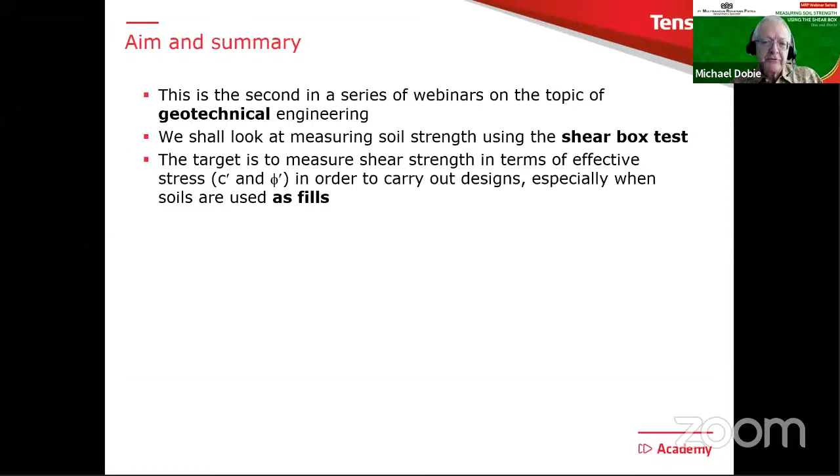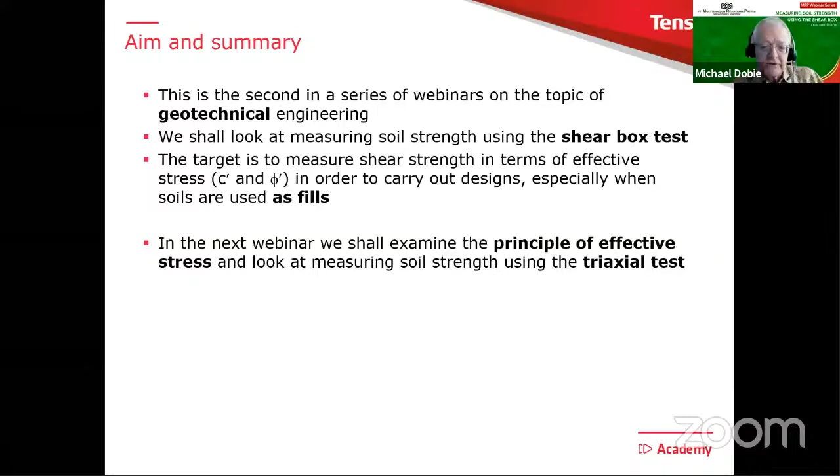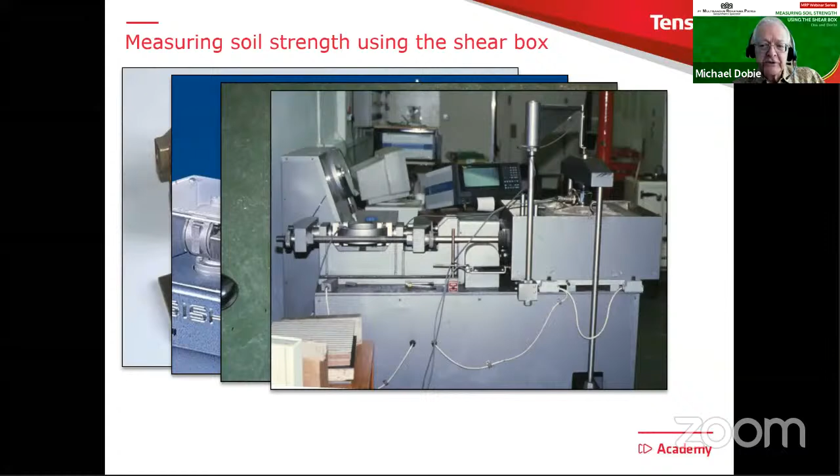What we need to remember in the whole of this discussion today is that what we're trying to find out is the shear resistance in terms of effective stress on a particular plane. Now, of course, in a shear box, the plane is created by the action of shearing in the middle of the shear box. We know that. Is that a bad thing? Well, not at all. It actually gives us a very good indication of shear strength, and I think that's why this test gets used so much.

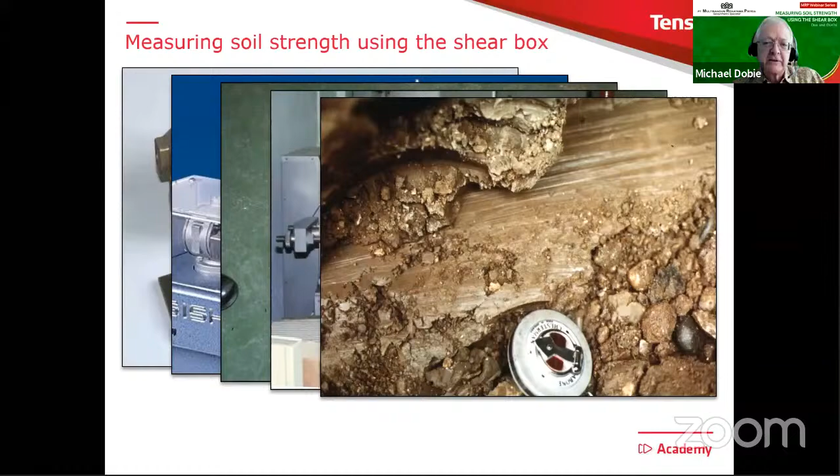I think the reason why I have made this our second webinar topic is that when I look at geotechnical reports from Indonesia and many other places, the shear box is frequently being used to determine the strength parameters for fills. So it is therefore an important test.

So who is it intended for, this webinar? Well, the aim here is really to supplement existing standards and codes of practice. And what I tell you is going to be based on an extensive experience of both carrying out and reviewing data from shear box tests.

Perhaps one target is to create some kind of checklist of features and test conditions which you should look at when reviewing results. As we go through this webinar, look out for these blue boxes, which will pop out quite a lot because they provide additional information and pose a few questions. You've already heard there will be 3 questions at the end, and maybe there will be some clues in these blue boxes.

The material is aimed at civil engineers in general who have some involvement in ground engineering, which is all civil engineers really. It might be of interest to more experienced geotechnical engineers, but the main target is looking at the strength properties of fills, in particular for reinforced soil applications, because that's the field we work in. This is vital information when looking at the design of these structures.

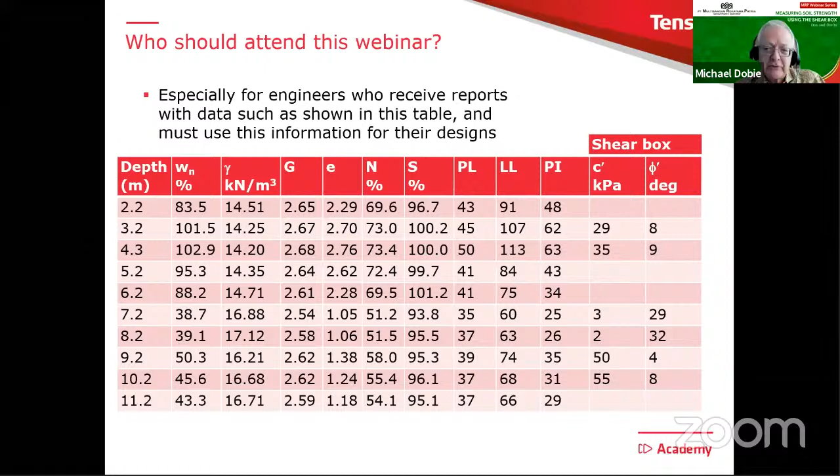I think in particular, it's like this. I'm sure many of you will receive reports, maybe from site investigation contractors, and get tables of values like the one you see there. At the end of this table, there'll be a couple of columns showing shear box test results, C' and Phi'. The question then is, should you just use those values directly? Should you just take them out of the report and put them straight into your slope stability program or finite element analysis software? Or should you have a bit of a look first and make sure these properties are suitable for the task you're going to use them for? You'll realize immediately that my answer would be yes, of course you should.

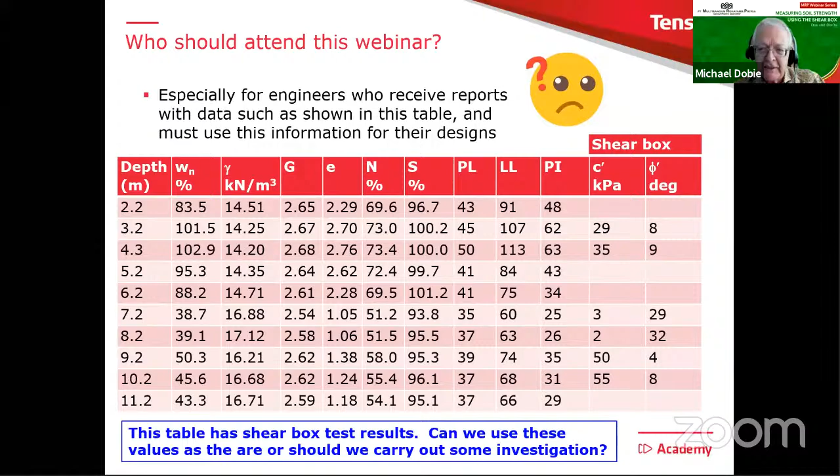Some important standards I'm going to refer to today: the ASTM, reference D3080, is for this particular test. In particular, it is for consolidated drained testing conditions, which is very important. Then there is an SNI 2813, which has the same basic title, but of course in Bahasa Indonesia.

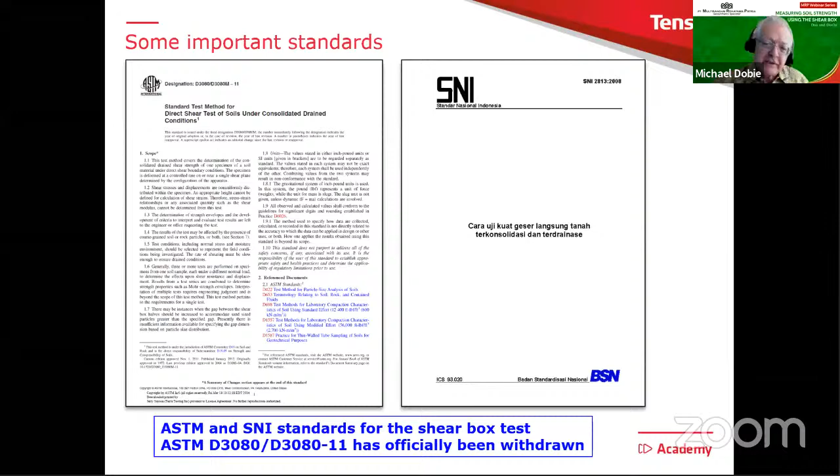It's actually interesting that the ASTM D3080 has officially been withdrawn if you look at the website. However, it's still an extremely good document. Of the codes I'm aware of, it's certainly one of the best. But I see no plan yet for what they're going to do to replace it. Anyhow, that is the situation with that one.

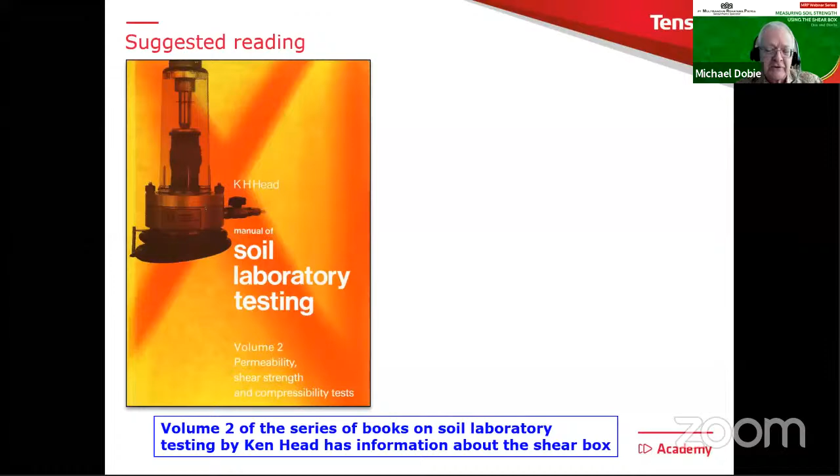As regards any books or reading, well, this was published many, many years ago. It's a series of 3 books published by Ken Head, and volume 2 covers tests like the shear box. It's probably a bit old fashioned now in some regards, but the basic information in there is extremely useful, and I certainly went back to this to help me with the preparation of some of the material in this webinar today.

Now you might say, wow, 1 hour on the shear box test, oh my gosh. Well, I'd have to say there's a lot to cover, and actually 1 hour may not be long enough, but I need to go quite quickly through this to give you some chance to ask questions at the end. But we're certainly going to look at the main issues with shear box and try to understand what you should do and what you should not be doing, and how to interpret information when you see it in reports.

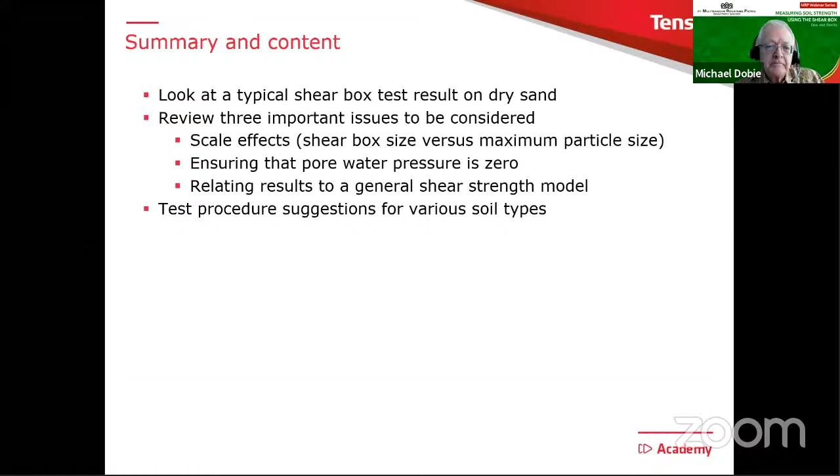So the content is like this. We'll first of all, to warm ourselves up, look at a typical shear box test result on dry sand, which is very straightforward conditions. Then I'm going to review 3 important issues which you need to think about when you look at shear box test results: scale effects, things to do with pore water pressure, and also relating your results to a general shear strength model.

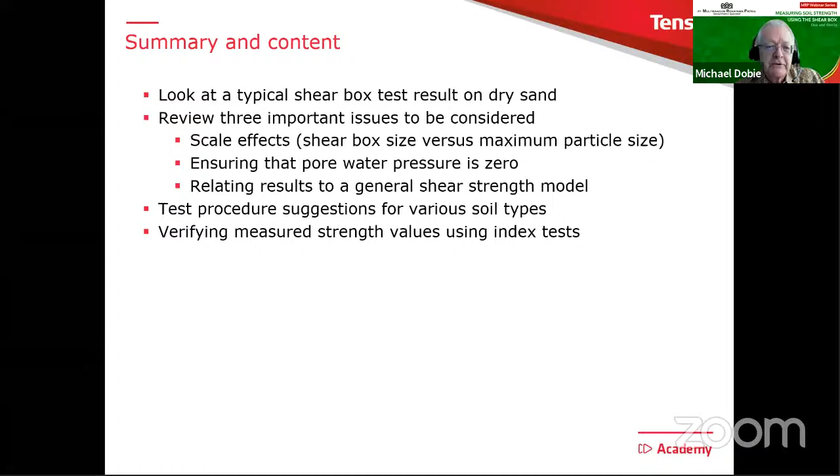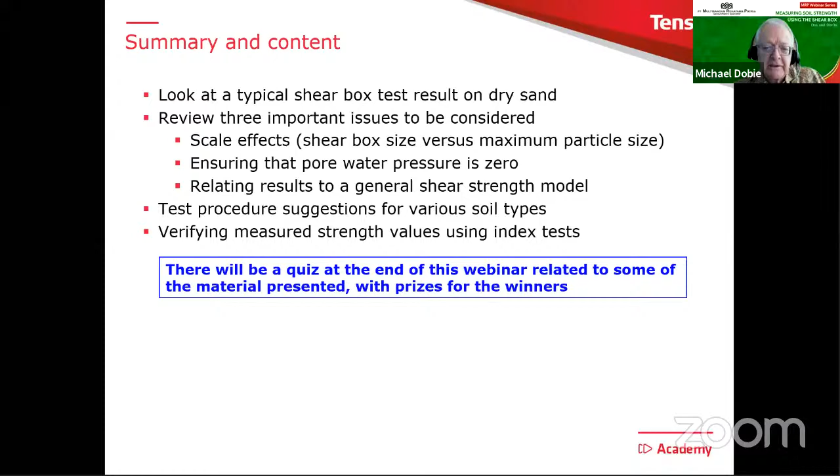I will then look at test procedures or suggestions for various typical soil types, and finally, we'll look at verification of strength values using index tests. It's a vital final step. When you have results from, say, a shear box test or even a triaxial test, it's a very good idea to relate them to index properties for the soil and make sure you get a good correspondence between the two. You've already heard at the end there will be a quiz, with 3 questions based on the material presented in this webinar, and there are some prizes for the winners. So let's look at this shear box test on dry sand.

Before we do that, here's a particle size distribution curve for the sand that's being tested. It's an FM sand, fine to medium sand. And I've also put there a red dotted line, which indicates the maximum particle size that will be tested on this particular occasion. So in this case, it's a very nice result because almost all of the material will be used for the shear box test.

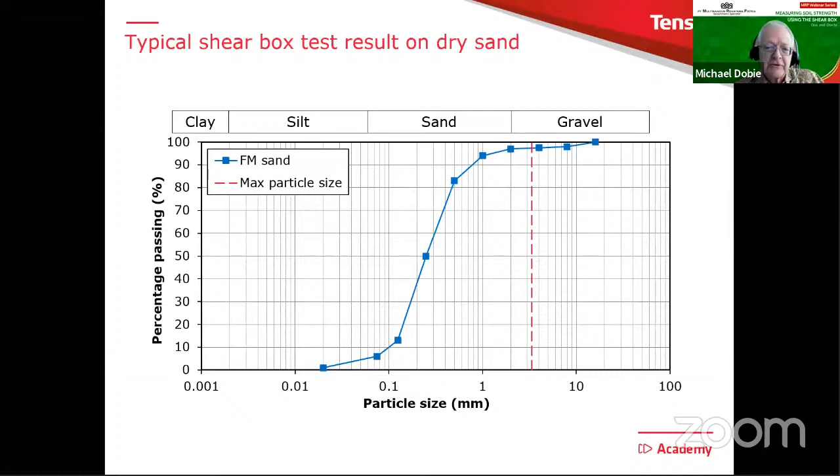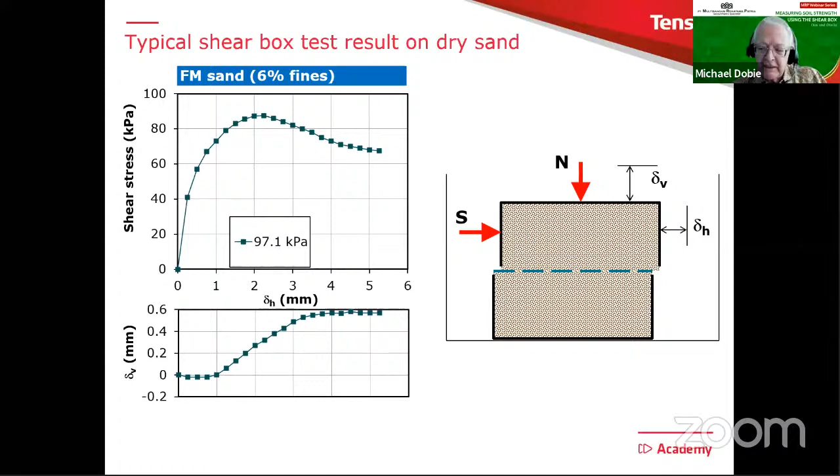Anyhow, we reach a peak value of the shear stress. We carry on shearing a bit further. The shear box starts to move purely horizontally, which we can also confirm in the lower diagram. So we see quite nicely from that animation how we expect the test to run.

So there is our typical result. And what I'm going to do with this, I'm going to add a little table of information on the bottom right. There are 5 items in here, which I'm not going to read through to you this time, but you're going to see this repeated several times in different examples of test results.

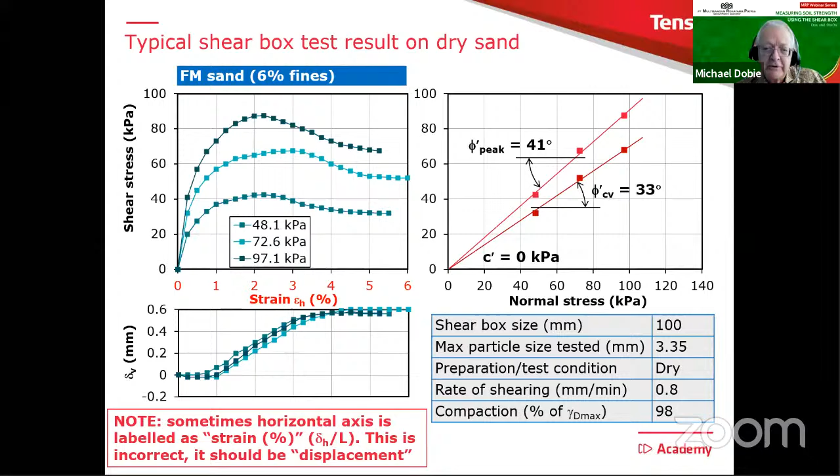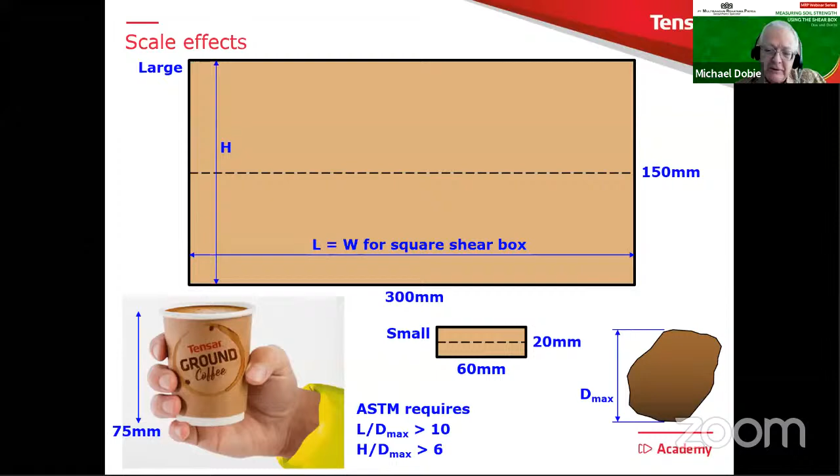One other important piece of information is the maximum particle size, Dmax, that we're going to test in the shear box. If we look at ASTM, it has these requirements - I won't read them to you, but you can see them there as a limitation on the maximum particle size. So if I put that into the shear box, it'll be 25 millimeters in the large shear box, and 3.3 millimeters in the small shear box. I've drawn the particles to scale.

But if you look further into the literature, you'll find information published by two well-known people, Jewell and Wroth, going back to 1987. They required that the ratio L over Dmax should be greater than 50 to get a representative result. If I change to that requirement, my particles shrink down to 6 millimeters and 1.2 millimeters, still drawn to scale. This is a nice way of getting an idea about what the particle size might look like compared to the size of the shear box. The dotted line in the middle is the shear plane, where the shearing will take place.

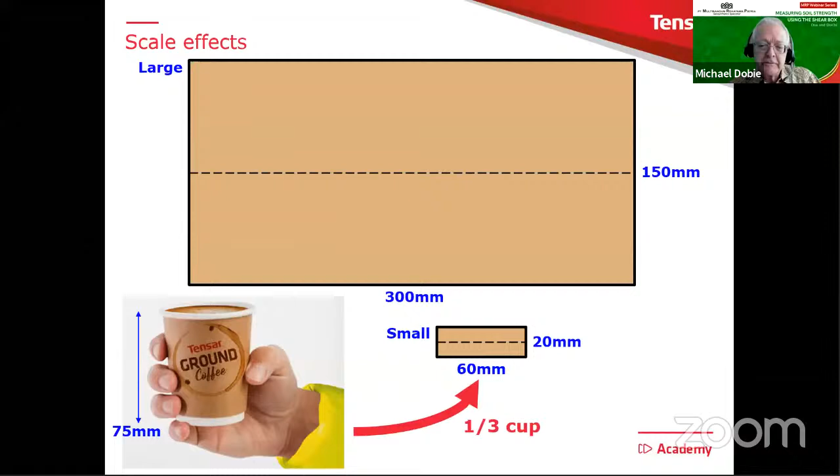One other point to make is the volume of soil in each type of shear box. If we take the ground coffee mug again, we need about a third of a cup to fill the small shear box, and really this should be used only for fine soils and sands. For the large shear box, you need 64 cups, and this one would be okay up to about the medium gravel size. We'll come back to those particular requirements a bit later on, but there we have the scale effects.

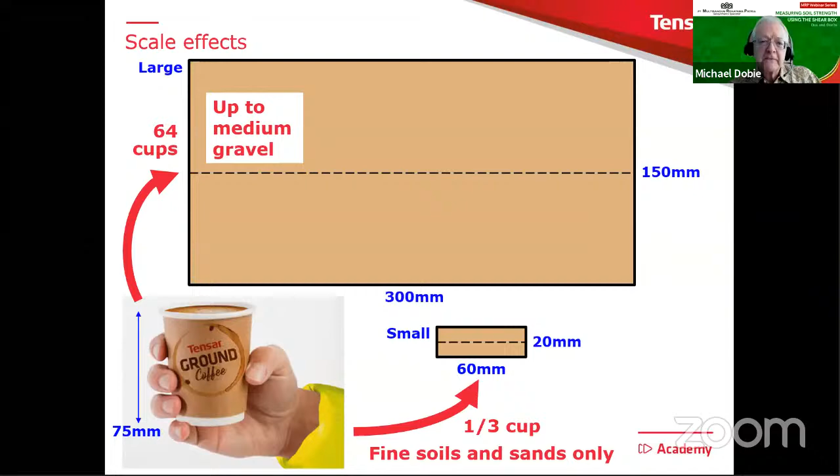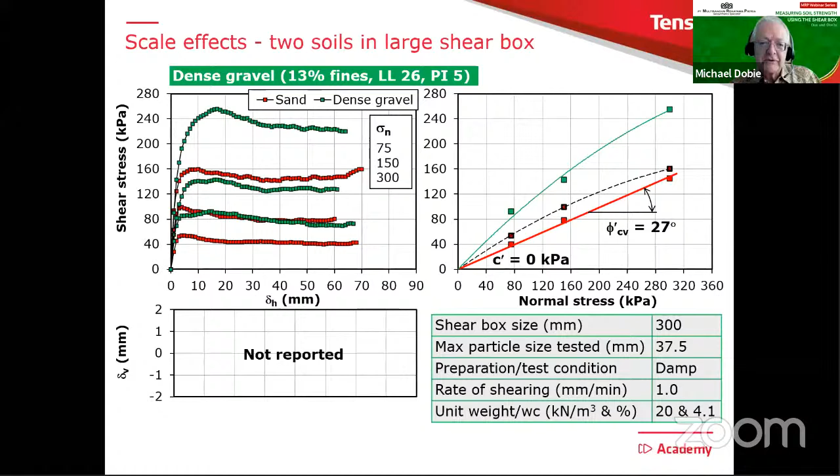If you compact the same gravel to a denser condition, you'll see that you reach the peak values more quickly because the gravel is denser. However, you still have to travel with your shear box quite a long way to reach those peak conditions. This is a nice illustration of the importance of shear box size on different soil types.

The next thing is about ensuring that pore water pressure is zero. When we interpret shear box test results, we use the Mohr Coulomb equation: shear strength equals C dashed plus the effective stress sigma dash times tan of phi dash. But we never know what sigma dashed is, so we have to write it as its two components: total stress and pore water pressure. We know the total stress because that comes from the normal load, which is a total load, so it gives us a total stress. But then the big question is, what is the pore pressure?

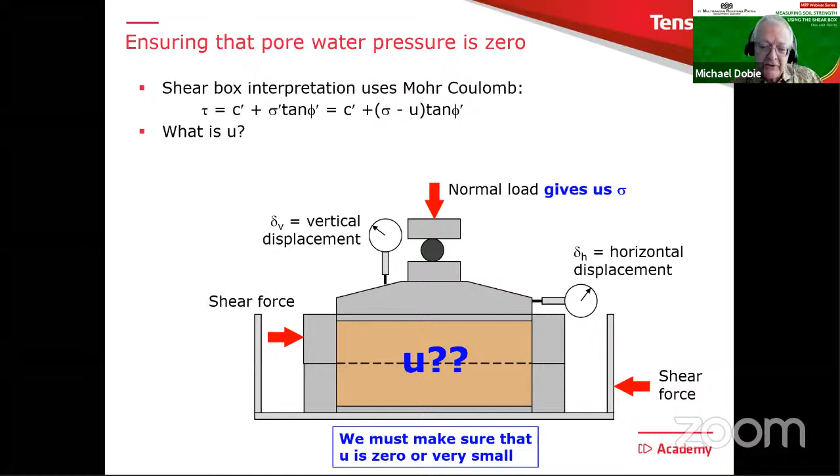This is a really important question, especially in the finer soils. In the shear box, unless you've got some very sophisticated equipment, which I'm not very familiar with, we cannot measure the pore pressure with standard equipment. So what we have to do is carry out testing to make sure that this U, this pore pressure, is either zero or very small indeed. One way to do this is to test dry, which is what we saw in that first example - the soil is dry and also the shear box is dry, no water at all.

Another test condition that frequently occurs is when the soil is tested damp - almost certainly the soil has had water added to it for compaction, but in the test procedure the box is left dry, so the soil stays damp. This can lead to great uncertainty about the U value, especially if you have a high fines content in the soil. So what we normally do to overcome this is saturate the soil.

The way we normally do this is by flooding the shear box. We fill up the surrounding part with water, and that water is able to communicate with the water inside the sample. This gives a way for the soil inside the shear box to reach a stable water pressure of around about zero. Please realize this does not mean we're implying the soil is going to be saturated when we use it as a fill - it almost certainly won't be. It's simply being done to make sure we know what U is.

This is an important thing to be aware of when you are reviewing the results from shear box tests. Let's go back to this diagram, and I'm going to put on here 3 possible results from shear box tests. There they are, the red squares.

Now, if I simply put that result into Excel and add a trend line, the trend line looks like this, and it's suggesting that we have a very high C dashed. This would be rather dangerous because at low stresses you're going to overpredict the shear strength. So we need to be very careful about this kind of interpretation when we look at shear box results.

Please be aware that C dashed, as you see it there, is coming from a backward extrapolation of the data. It's not actually being measured. And of course, how can it be over-consolidated? Well, this is also induced by compaction. So when we compact the fill into the shear box, this effectively over-consolidates it.

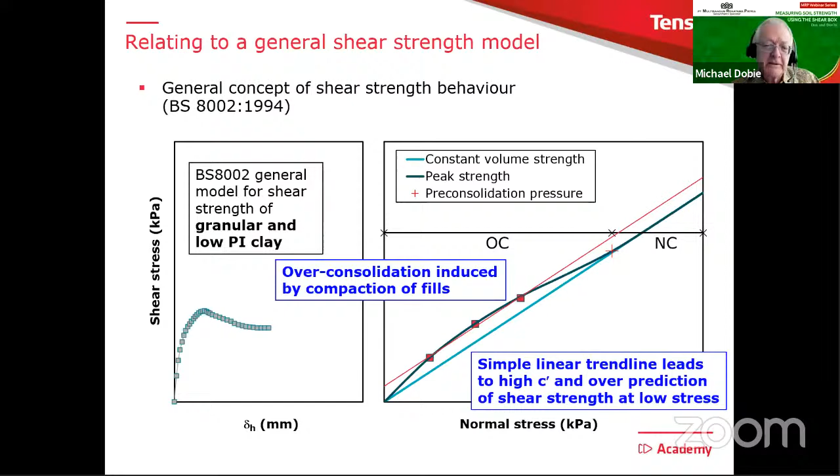So start with the fine soils, clays and silts. We can definitely use the small or standard shear box because there are no scale effects. But the big issue is pore water pressure, making sure that it is either zero or negligible, thinking back to that previous slide a few minutes ago.

Pore pressure in a clay will react to the loading, both the normal load and the shear stress. And it's vital that test procedures make sure we keep the excess pore water pressure as low as possible. This requires 3 stages: saturation, consolidation, and shearing. This can take a long time, easily 24 hours per stage. So that means 1 test is 3 days, 3 samples is 9 days. This kind of test procedure is likely to be relatively expensive.

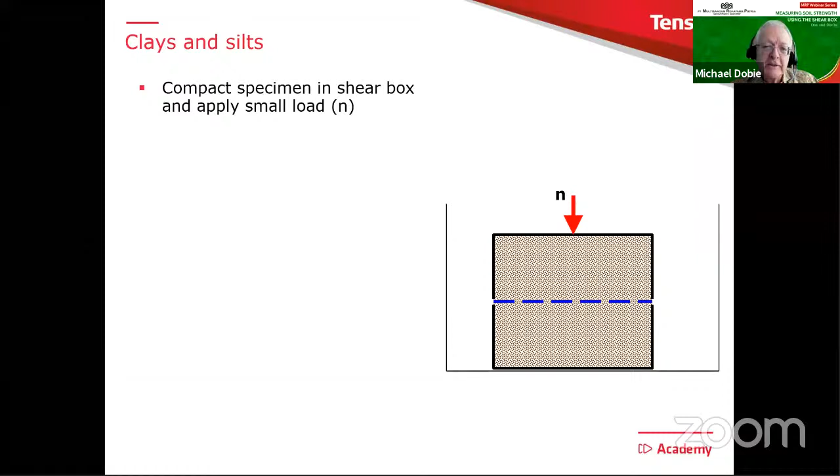Let me just explain what I mean by some of this. So let's look at setting up a test. We prepare our sample in the shear box, and we normally apply a small normal load just to hold it in position. Then we fill the shear box with water, and we leave it for at least 24 hours until, and you'll see by the coloring, the sample becomes saturated.

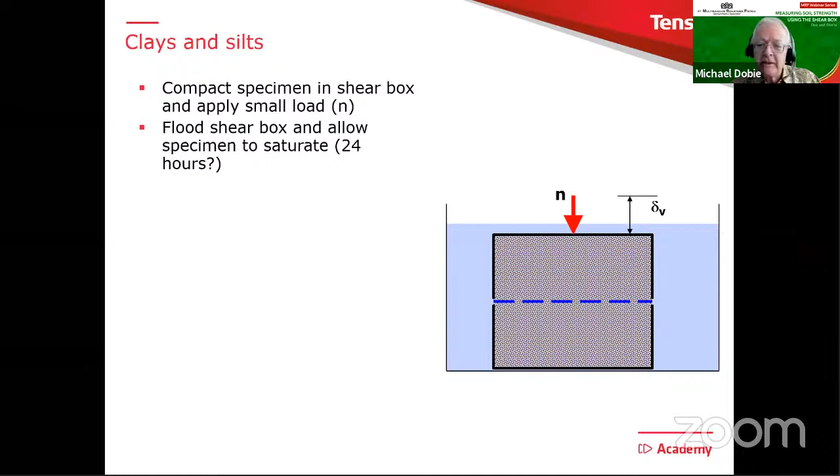Now, you won't get it fully saturated. You can't drive out all the air, especially from a fine soil. But the important thing is you have a good connection between pore water in the sample and the water outside in the shear box. So that's the saturation stage of the test.

We now apply the full load, big N, and we then plot a curve or graph of the vertical settlement versus root time. Here could be a typical example. You can also plot against log time.

There are two ways. It's like a consolidation test, but we're generally going to pick out one of 3 times, either for 50% consolidation, 90%, or 100%. It depends on the code of practice you're looking at. And this, of course, is the consolidation stage of the test.

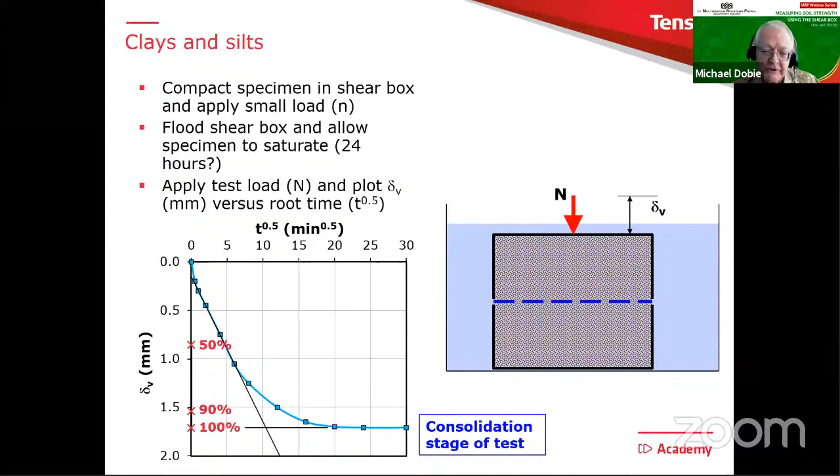So having identified either T50 or T90 or T100, we then calculate the required time to failure in the shear stage of the test, and we take it as either 50 times T50, 11.6 times T90, or 12.7 times T100. It doesn't really matter which one you use because they're going to give you much the same result.

Once we've done that, we then have to make an estimate of our displacement at failure, which we probably know accurately after we've done a few tests. To begin with, you can guess it. And then from that, we calculate the rate of shear, rate of displacement, which equals DF over TF.

A quick example: imagine we do the test and our T50 is 10 minutes, quite likely for a clay material. So our time to failure, TF, should be 500 minutes. And if we estimate that DF is going to occur after 5 millimeters of movement, then our rate of shearing or rate of displacement should be 5 over 500, which is 0.01 millimeters per minute, which is very slow.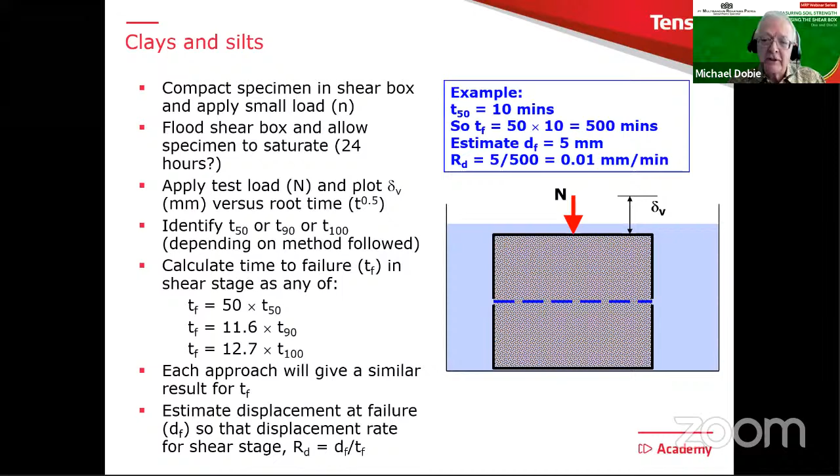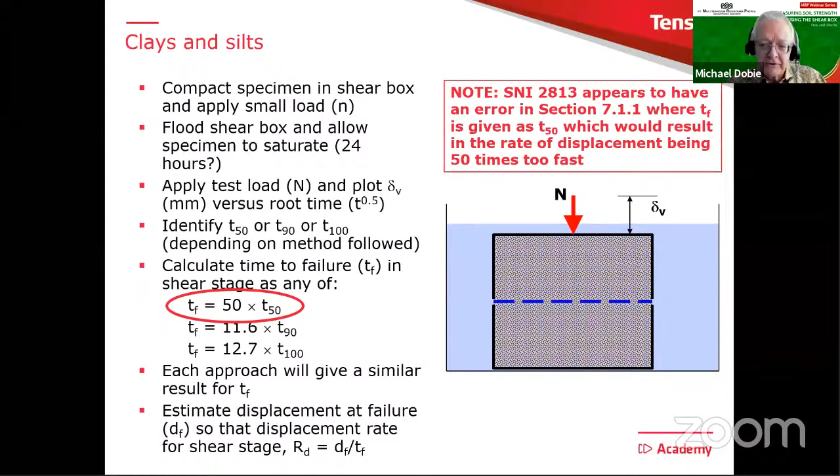A word of warning about the Indonesian standard SNI 2813, because there appears to be an error in section 7.1.1, where the TF value is given directly as T50. In other words, the formula in the SNI doesn't have the 50 in it, it just says TF should equal T50. If you follow that procedure, your shearing is going to be 50 times too fast, which is not a good idea, as you're going to see in some of the examples.

Having calculated that rate of shearing, RD, or the rate of displacement, we then apply the shear force and the rate of movement of the shear blocks. It's a displacement control test, so the rate will be given by RD, calculated from the consolidation stage. So that's the shearing stage of the test.

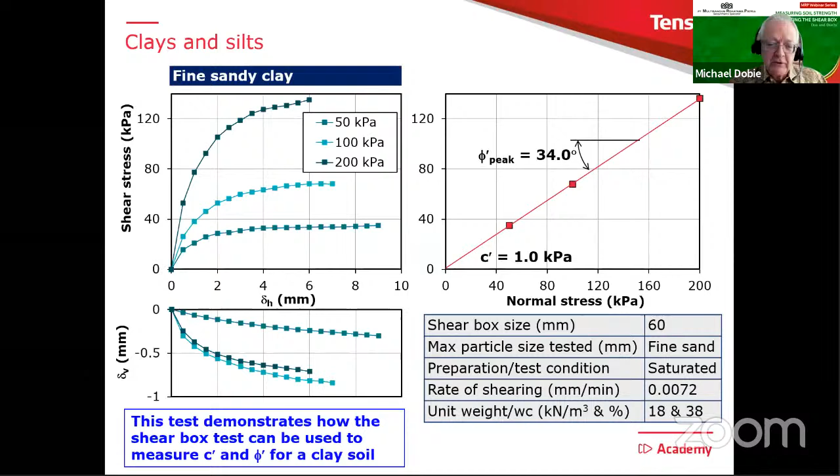Let's look at a nice result here. This is a test on a fine sandy clay. It's pretty complete - we have the box size, it's a small shear box, maximum size is fine sand. It was done saturated, meaning both the sample and the shear box full of water. The rate of shearing is really slow, 0.0072 millimeters per minute. This is a nice demonstration that you can get extremely nice looking effective stress parameters out of the shear box test, providing you do it slowly in the case of clays.

Okay, nice test. Here's another one - these are some tests on silty desert soils. They're low PI, and they're classified in AASHTO as A-2-7 soils, so that should tell you something about them. What we see here is a reported shear strength of C equals 41 and phi equals 22. Now, what do you think about that? Let's have a look at the information.

It's a 100 millimeter shear box, only got fine material, so there's no problem with scale effects. But the test was done damp, not flooded, at a rate of shearing of 0.8 millimeters per minute - so very fast. This means we have concerns about the pore pressure inside the shear box. In fact, this is a very good example of something I've given a special name to - I call it a high C, low phi result. And I see it many, many times, coming from testing fine soils, clays or silts, in the shear box at very high shearing rates like this.

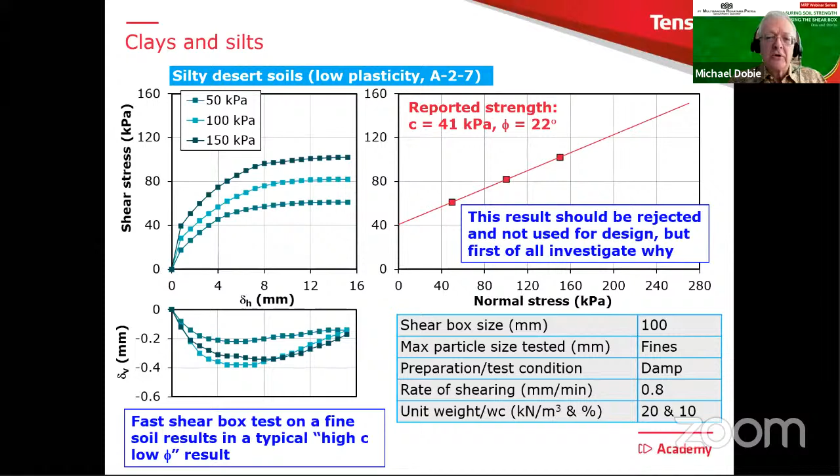Now, if you are confronted with that result, I'd suggest you simply reject it - you cannot use it for design, it doesn't make sense. However, your client or the consulting engineer might not be very happy if you simply reject it. So what you should first do is investigate the result and find out the reason for that kind of behavior.

Now, the explanation is like this - let's imagine this particular soil has a C dashed of 0 and a phi dash of 27 degrees, and I draw that line on the same diagram. The horizontal distance between those points is therefore suction in the sample. So it's the suction that's giving us the high C, low phi result. Please be aware of that, but do not reject out of hand - please investigate first before you do so, to make sure you understand why you have that kind of behavior.

But here's a bit of a problem, because these are some published test standards for the shear box for clay soils, and there are 3 of them. First, slow shear test for clay soil: rate of shear less than 0.02 millimeters per minute, or time to failure greater than 50 times T50 from the consolidation test - exactly what I've just been talking about, so perfect for carrying out this kind of testing. Second, consolidated fast shear test for clay soil: rate of shear 0.8 millimeters per minute. And third, unconsolidated fast shear test for clay soil: rate also 0.8 millimeters per minute.

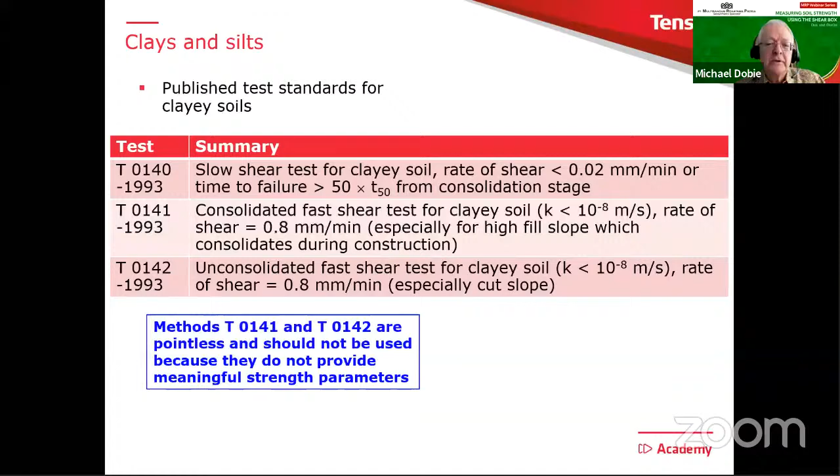The second two, T0141 and T0142, are pointless. The data you get from those will be something like the previous example - they do not provide meaningful shear strength parameters, certainly not C dash and phi dashed. So please avoid those sorts of test procedures, and if you find tests carried out following them, please be very suspicious of the results and carefully review, as we did in that last example.

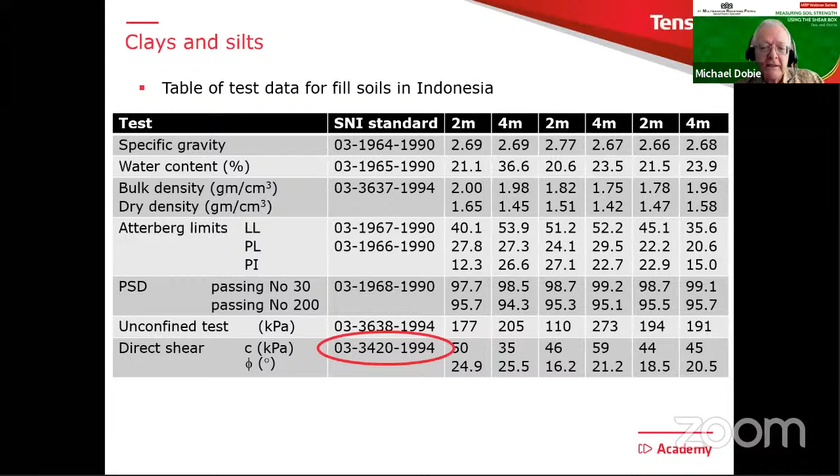Here is some data from a fill soil in Indonesia - lots of nice data there, all the information we'd like to know. Unconfined test towards the bottom, and it's got some quite high values, so it's quite a stiff clay. And we got C and phi - what do we see? High C, low phi. But if we look at that particular SNI standard, it is for an unconsolidated fast shear test, and therefore it gives high C, low phi.

Let's move on now to the next type of soil, sands with high fines content. Now we can use the standard or small shear box, that's okay because we're not going beyond the sand size. But the problem is with a high fines content, you may run into similar problems as we see with clays and silts when it comes to the issue of pore pressure.

Therefore, we also need to be careful about the rate of shearing, but unfortunately in these soils it's sometimes difficult to measure T50 or T90. Luckily, ASTM gives useful guidance about suggested times to failure you can estimate. It says TF should be assumed greater than 60 minutes if fines are more than 5%, and greater than 200 minutes in the case of a clay sand. That's useful guidance to keep in mind when planning this kind of testing. As a general rule, slower is better - if you're not sure, test more slowly.

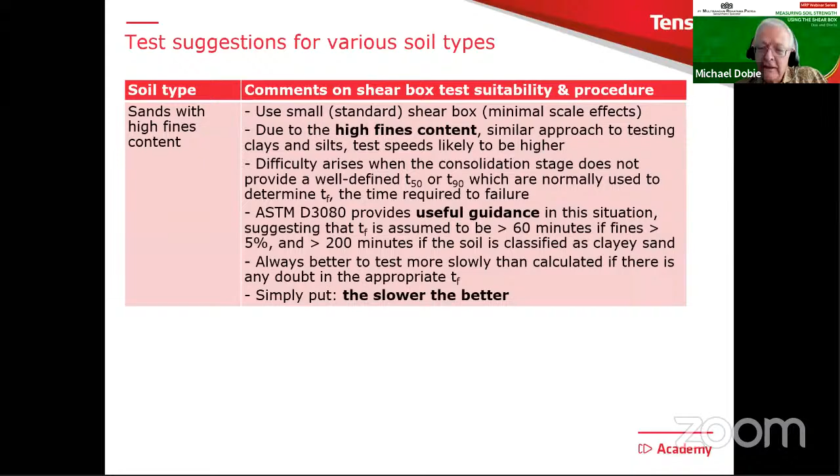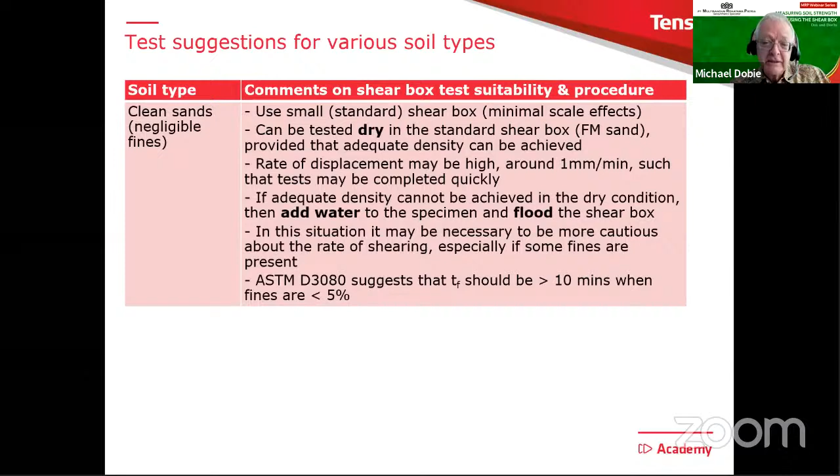Move on to clean sands, with negligible fines, very much like the first example I showed you. Again, the standard shear box is normally okay as long as we stay in the sand sizes only, so minimal scale effects. You can test them dry if you can achieve adequate density, and a high displacement rate is no problem if they're dry. But if you decide to add water and flood the shear box, you may have to be a bit more careful about the rate of shearing. ASTM suggests T to failure should be greater than 10 minutes when fines are less than 5%.

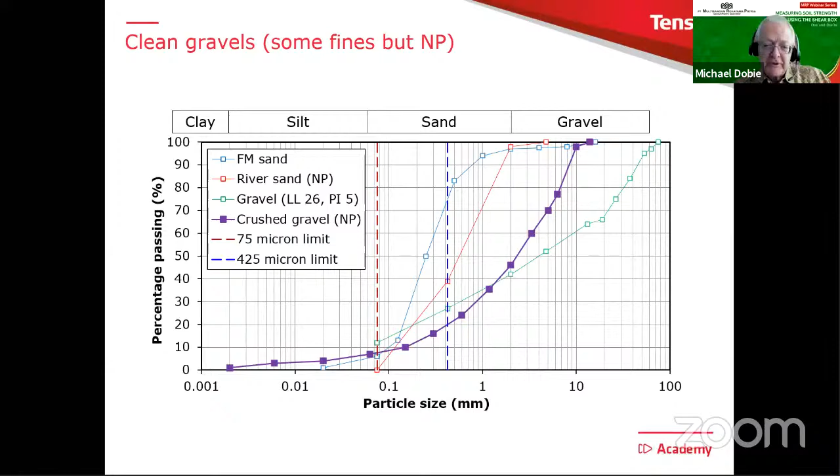So I'm just going to show you a result here. This is for a crushed gravel - nice angular particles, well graded. This is the purple colored material. I've superimposed it on the grading curves from the previous examples we looked at, and I've also added those dotted lines: the 75 micron limit, where we normally say fines start below that value, and the 425 micron value, if you remember from our previous webinar, because below that value is the material we use to do the Atterberg limits. This one turns out to be non-plastic. And here are the results.

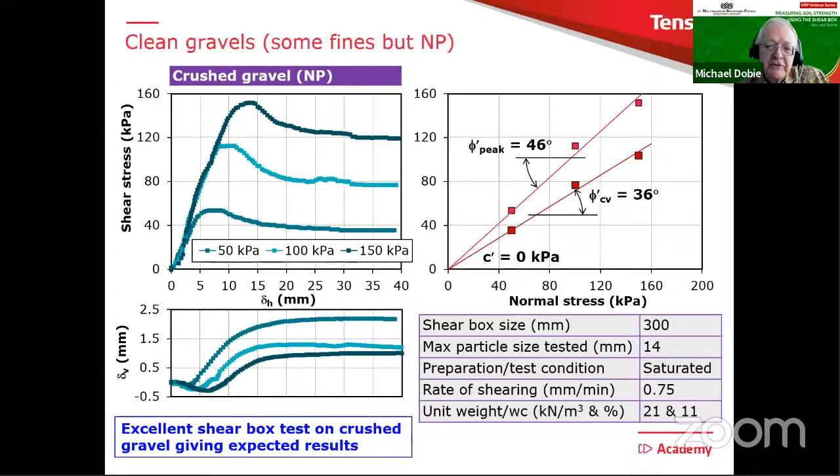So jumping straight in, you'll see again quite large horizontal displacements, up to 40 millimeters, because it's a large shear box, well-defined peak values and a well-defined constant volume behavior. This is a particularly nice example. Maximum particle size is 14 millimeters and it was done saturated, but despite that it was also tested quite quickly. The testers were happy that it could be tested quickly even though it was saturated. So it's a really excellent shear box test on crushed gravel, and it's giving the kind of phi peak and phi CV you would expect from a material like that.

Now here's a topic which I think is quite important, what I call testing the wrong soil. So here is a soil, a well-graded sandy gravel with a bit of fines in it. And you get a result back, and the result looks like this. Unfortunately there's lots of information missing, but I still show everything to remind us what should be there. We've only got the peak shear stresses, and we get a phi of 35 degrees, which isn't bad. But when we look carefully, we see a 60 millimeter shear box, maximum particle size tested was 2 millimeters, saturated, quite fast shearing, and it was well compacted.

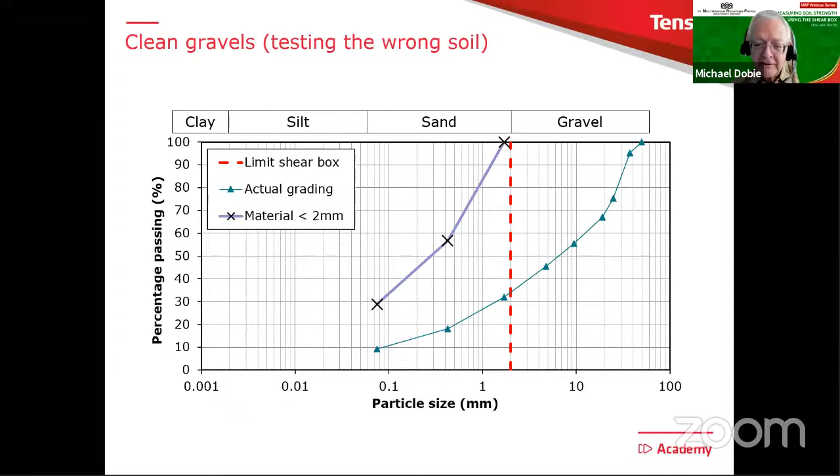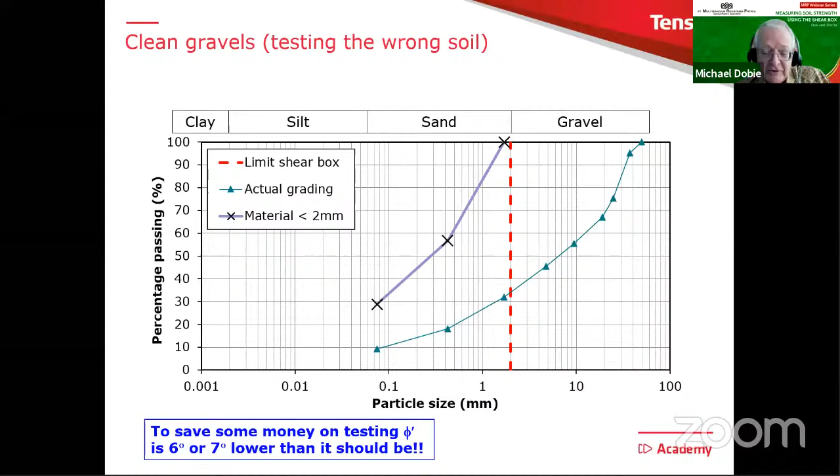So what about this? This means we're testing a material that's a gravel, but only up to the 2 millimeter particle size. If we go back to the particle size curve and remove the coarse particles, we end up testing what is essentially a fairly well-graded sand with a fairly high fines content, far away from the actual material. So we saved some money on a cheaper test, but we lost maybe 6 or 7 degrees on our phi value. If you were designing a big retaining wall, that could cost a lot of money, because a difference of 6 or 7 degrees in phi would have a big effect on a retaining wall design. So do not rely on small shear box testing of gravels when you're serious about getting a representative value of phi dashed.

Gravels with high fines content - now these really represent some of the most difficult soils to test. The reason is that the coarse fraction will probably dominate the shear strength behavior, but the fines and the fine sand will probably fill up the voids and then dominate the pore water pressure response. This is difficult. We really do need to saturate, but then we get worried about the creation of suction on shearing - I'll show you a picture of that in a minute - and that'll happen if you test very quickly. But the problem is with a large shear box, if you go through the full saturation, consolidation, and shearing procedure, the duration of the test could be extremely long, and to be honest, people would rarely do it. So what do you do? Well, I think these soils are difficult.

One possibility, if you're satisfied that the coarse particles will dominate the shear strength behavior, is to actually do the test dry. You might have to remove some of the fines, otherwise it would go hard and kind of set inside the voids, but you could test them dry. It's a possibility, but it's a judgment you have to make when testing this kind of soil.

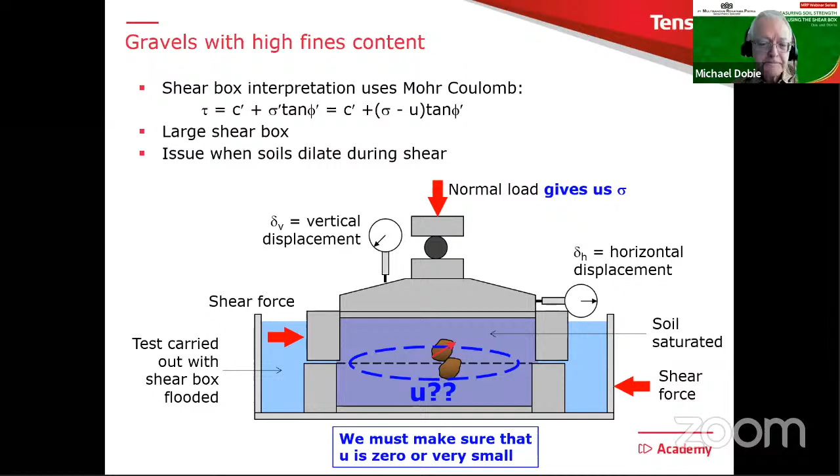Here's a rather interesting test. When you first look at this one, it doesn't look bad, but it's a test on gravel with some plastic fines. When we look at the shear stress versus horizontal displacement graph, they look quite good - you've got some peaks and they drop down to lower values. But when we look at the details, it's a 60 millimeter shear box testing a gravel carried out damp, with a fast rate of displacement, fairly well compacted. So you have to be somewhat curious and suspicious about a test like this.

If, for example, you put a straight line on the peak strength values, you're going to predict a very high C-dashed, maybe 50 or 60 kPa, which is simply not reliable. Another thing that's very interesting here, you can see a red line on the lower left diagram - this is the rate of dilation, which is an amazing 3.3. What does that mean? It means that for every millimeter the shear box moves horizontally, it moves upwards 3.3 millimeters. It's going up a really steep hill.

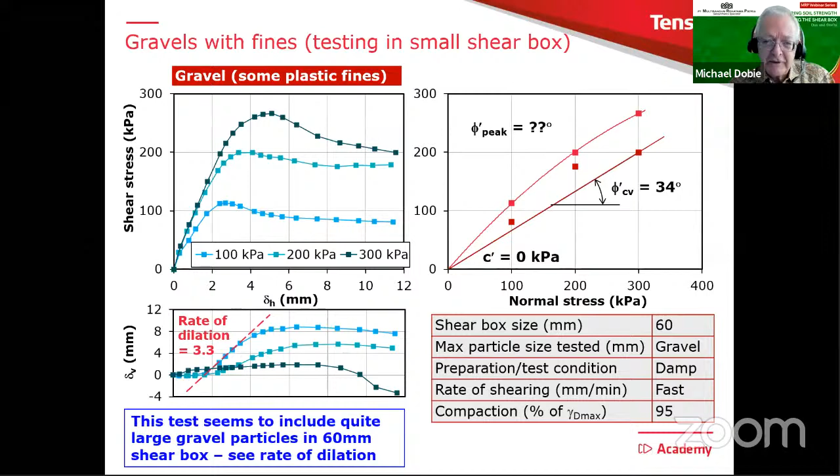It's difficult to imagine how that can happen, so you have to be a bit suspicious of this test, and you'd have to be very careful how you interpret it. So really, if you put gravels in a small shear box, you're going to get some unusual or strange looking results.

The last soil type to mention quickly are what I'm calling mixed or gap graded soils. These may not be as difficult as you think, and there are two main approaches. If you have a gap graded soil in which the coarse particles dominate the grading, so you have coarse particle rubbing on coarse particle to give you shear resistance, then you could just test them as gravels with a high fines content, and maybe even consider going dry and removing some of the fine material. But you've got to be careful.

If fine particles dominate, in other words, if you've got coarse particles in a matrix of say silty clay, like many glacial tills, which we don't have in Indonesia but we have in other places, then probably the best thing to do is to remove the coarse particles and test it as a silty clay in the standard shear box, following all the normal saturation, consolidation, and slow shear procedure. I've got no pictures for that.

Last thing to mention: what about procedures for verifying? I mentioned this is really important. Having measured strength, you need to use index tests to verify that your values are reasonable. This particular technique, which is actually published now in two of the recent British standards that have been brought into line with Eurocode, gives you a very simple approach. So you've got two little equations there.

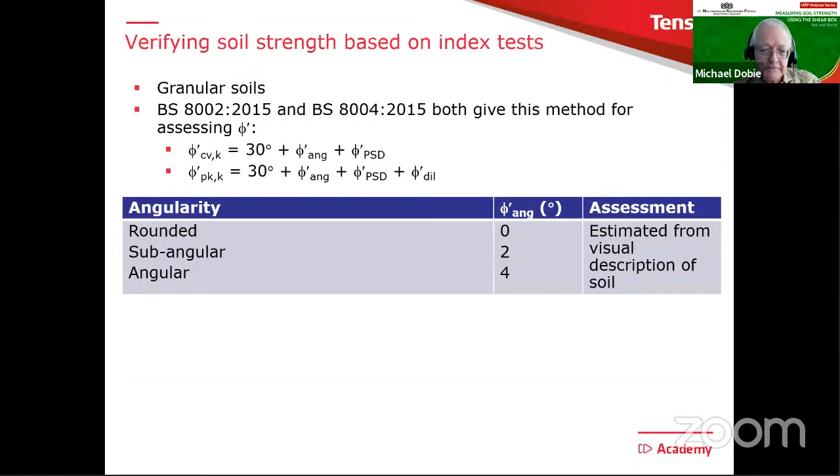So in terms of angularity, between 0 and 4 degrees that you add on, ranging from rounded to angular. When it comes to particle size, again ranging from 0 to 4 as you go from uniform, that is to say single size material, all the way up to well graded, with some special recommendations on gap graded soils. For this, of course, you need to look at your particle size distribution curve.

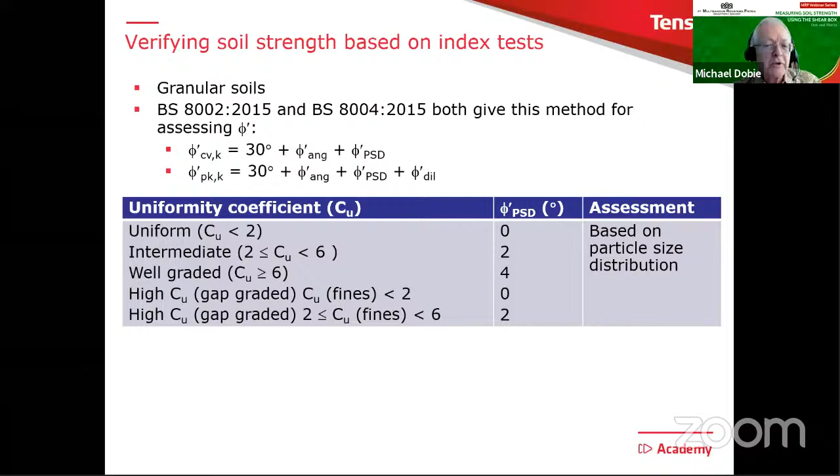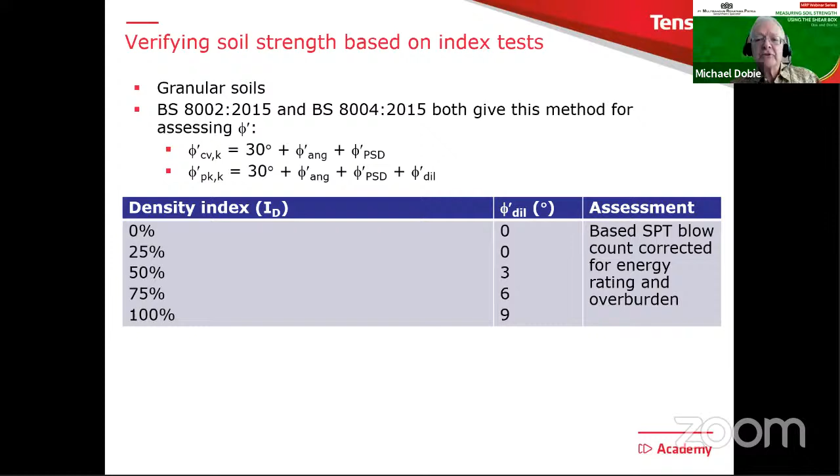Okay, so that's dealt with the first two. What about dilation? This particular recommendation is really looking at in situ soils, and it's basing dilation on what's called the density index, which can be related to the SPT result, for example. In terms of compacted soils, you'd have to try and make this assessment in a different way. But just to show you what it looks like, let's go back to this test result.

Would you use 8 degrees for design? You have to make that judgment. Probably not, because you'd struggle to guarantee that you're going to have such a huge dilation everywhere at the same time during, say, the development of a shear plane within a structure. So I'm not talking today about how you interpret it, I'm just talking to you about the data which you need to have to do it.

What about fine soils? If you go into the literature, there are many published correlations for phi dashed, normally with the plasticity data. This graph is a really elegant one, a very nice application of the Atterberg limits, relating both peak and residual shear strength. You can see the brown and bluish colored dots relate to the distance above or below the A line, and I'll explain what I mean by that in a minute.

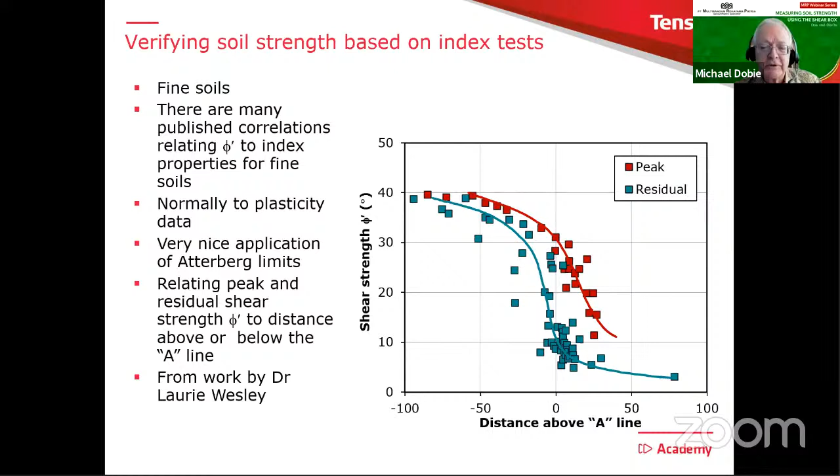This is actually work published by Dr. Laurie Wesley, who I'm sure many of you will have heard about, especially as I mentioned him in our last webinar with his books. This is a very nice relationship, and I think it's a very useful one to take into account. The extreme ends of the distance above and below the A line relate to some very unusual soil types—let's not worry about those too much—but the ones closer are useful.

It's like this: there is a typical Atterberg limit diagram and plasticity chart. So we were talking about distance above the A line, that little blue arrow, or distance below the A line. That's what that meant on the horizontal axis of that previous diagram.

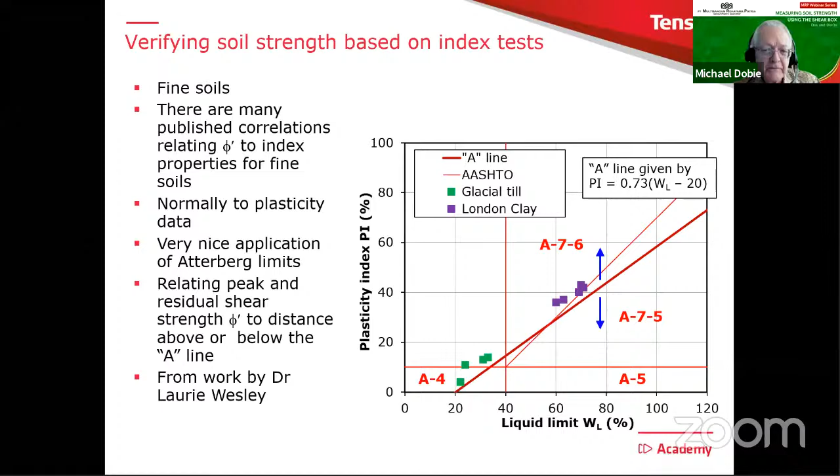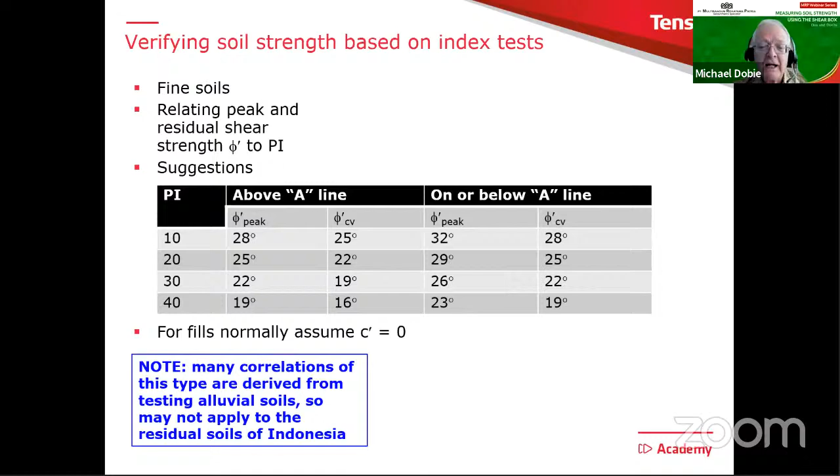From that, I developed this little table. It's just a suggestion where we might look at the PI, see whether we're above or below the A line, to give us some indication of likely phi peak or phi CV for design of an earth structure. Normally for fills, we're going to assume that C dashed equals 0. Some codes permit you to use a small value, but many codes would recommend for fills in particular that you keep C dash to 0, and I think that's the wise advice. Sometimes for very plastic soils we might go a little bit, but the maximum will probably be about 5 kPa.

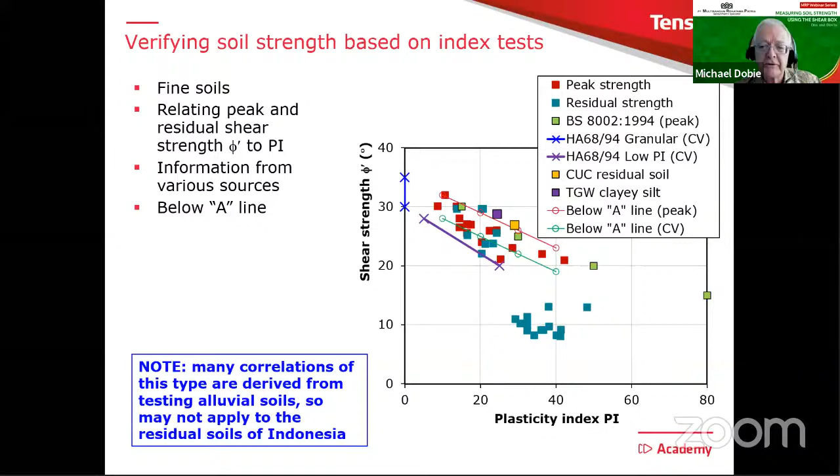So if I take my recommendations and go back to this graph and plot them, they are the little straight lines with the circular symbols. That's the recommendation for above the A line, the lower values, and this would be the recommendation for below the A line. This is just my own ideas—you won't find those published anywhere else, but they seem to fit the typical ranges of data we see from these correlations. Just one more reminder: this applies mainly for alluvial soils, and probably glacial soils.

So, a few conclusions and suggestions. First of all, the shear box—although many people say it has all sorts of problems, and the triaxial test should be greatly preferred—is still a really good test, especially for recompacting fills, which can be very difficult to do with triaxial testing. We can get very good values of C dash and phi dash for a wide range of soil types, providing we carry out the test following the sorts of guidance I've been talking about in this webinar.

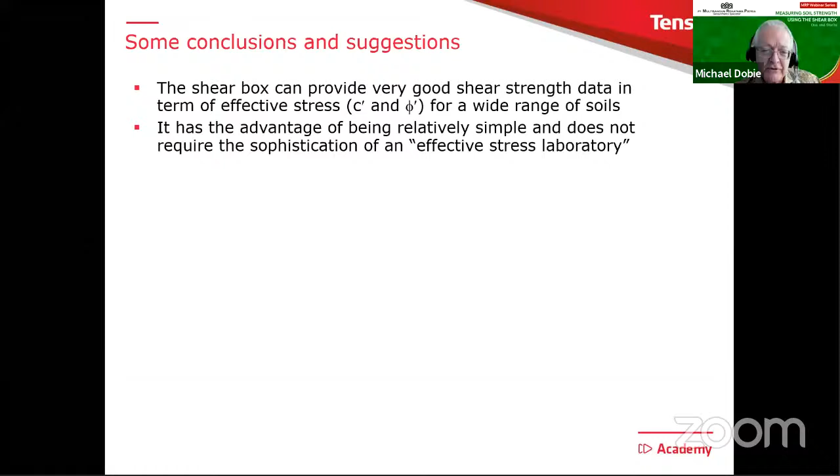It has the advantage of being very simple. We don't require the sophistication of what's called the effective stress laboratory. Those of you familiar with soil testing laboratories will know there's normally a special room called the effective stress laboratory, full of computers and pressure control equipment and complicated-looking triaxial cells. We don't need that for the shear box. The next webinar will talk more about what happens in the effective stress laboratory, but in the case of the shear box, it's not normally in that laboratory—it'll only be outside in a different area in most labs.

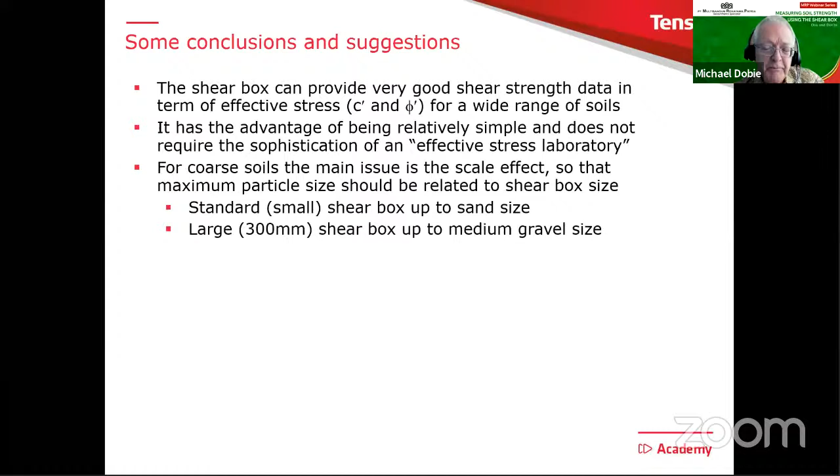For coarse soils, the main thing you need to think about is the scale effect, so that the maximum particle size you test should be related to the size of the shear box. The standard or small shear box really shouldn't go beyond sand size, and the large one, assuming it's 300 millimeters, should not go beyond medium gravel, certainly not into coarse gravel.

For fine soils, the main problem is to do with the pore pressure issue on the shear plane when you're shearing the sample. You've got to try to make sure it remains either 0 or very small, and this has got to be controlled very carefully by the full testing procedure: saturation, consolidation, and slow shearing.

We need to base that rate of shearing on the consolidation stage, which we saw in detail earlier on. As I said before, if in doubt, slower is better. And the other thing to do is to be on the lookout for what I call the high C, low phi results, and have a very careful look to see why you're getting them.

I suggest when you're reviewing shear box tests, you can make a simple checklist, which can really follow the diagrams I've been showing you many times, to make sure you've checked shear box size, particle size, etc. How is it tested? And so on. The rate of shearing, really important.

And also, finally, I would always recommend that you verify the results you see from shear box testing against index properties, as we've just looked at briefly in the previous slides.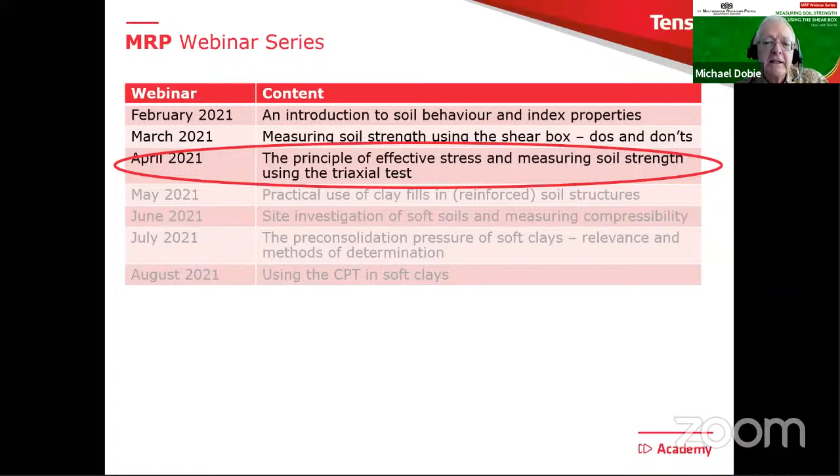It will be on the principle of effective stress and measuring soil strength using the triaxial test. In the meantime, thank you very much for listening, and I will do my best to answer any questions that you might have.

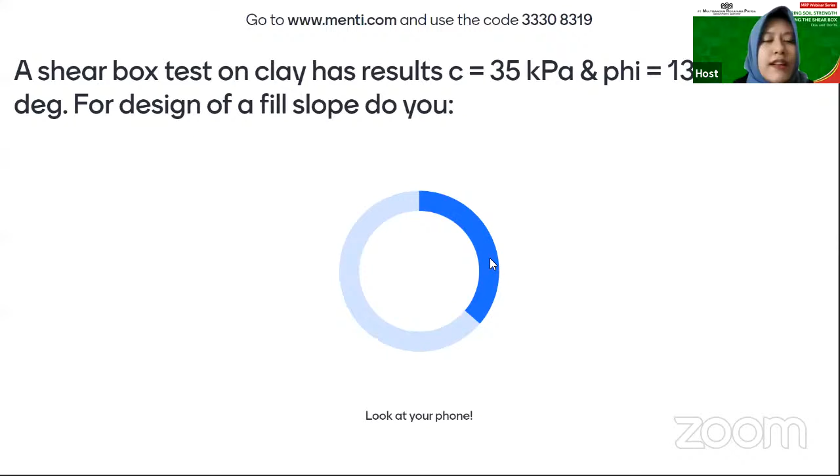A shear box test on clay has results C equals 35 kilopascals and phi 13 degrees. For design of a fill slope, do you: A, reject the result; B, accept the result and use it in your analysis; or C, try to find the full test result and investigate the method used?

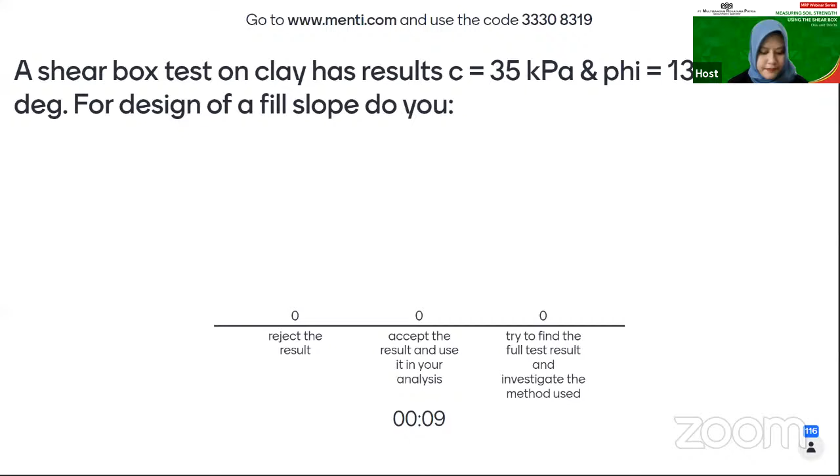3, 2, 1. Baik, jawabannya adalah try to find the full test result and investigate the method used.

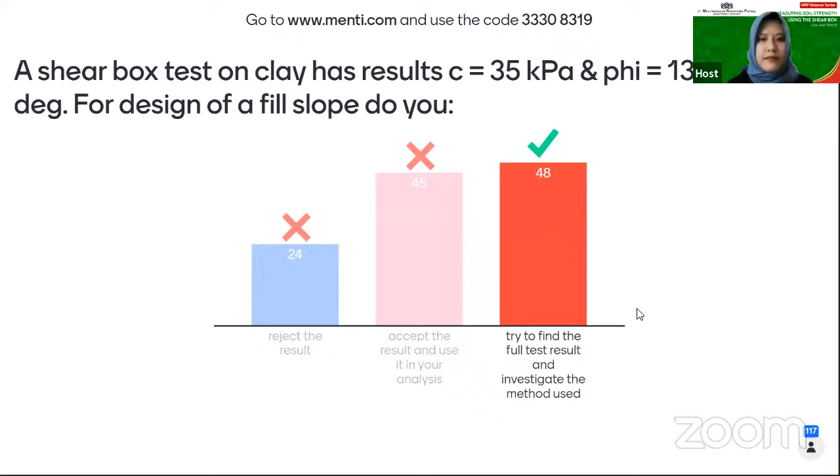Ada 48 orang yang benar. Kita lihat di pertanyaan ini siapa yang memimpin klasemen, tapi belum tentu menang ya. Yang jawaban tercepat di akhir nanti itu pemenangnya, 3 orang. Tapi kita lihat dulu siapa pemimpinnya. Siapa kira-kira? Ya, yang tercepat adalah Rosi Elfri Alawiyah.

Kita lanjut, pertanyaan kedua, masih bisa mengejar yang lain dengan menjawab dengan cepat dan tepat. Kita masuk ke pertanyaan kedua. Question 2 of 3. Answer fast to get more points.

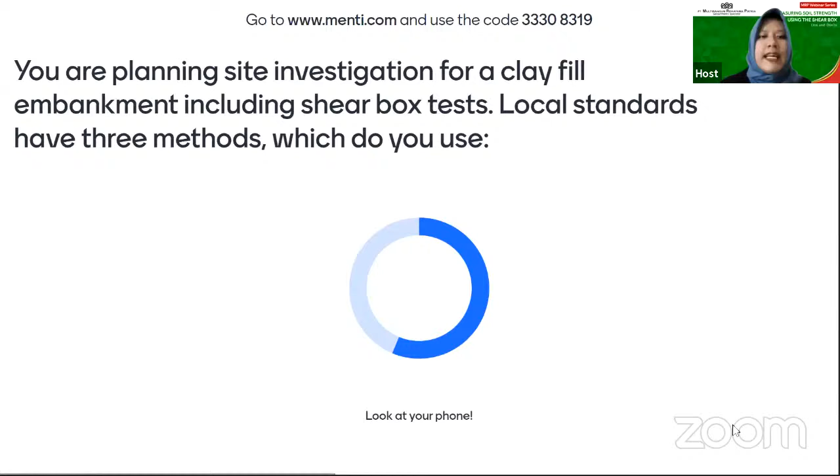You are planning site investigation for a clay fill embankment, including shear box test. Local standards have 3 methods. Which one do you use? Do you use consolidated fast shear at 250 USD per test, or unconsolidated fast shear at 150 USD per test, or consolidated slow shear at 1,000 USD per test? You have 35 seconds to answer the question.

Silakan, waktu Anda 20 detik lagi. Pertanyaannya, you are planning site investigation for a clay fill embankment including shear box test. Local standards have 3 methods. Which one do you use? Yang pertama, yang kedua, atau yang ketiga? Waktu Anda 10 detik lagi.

Kita lihat siapa yang memimpin di pertanyaan kedua ini. 3, 2, 1, waktunya habis. Kita lihat siapa yang memimpin, tapi belum tentu menang, yang lain masih bisa mengejar. Yang tercepat adalah Tubagus Ferry, tapi yang memimpin leaderboard di pertanyaan kedua adalah Antoni Gunawan.

Kita masuk ke pertanyaan ketiga. Pertanyaan terakhir, pastikan internet Anda siap untuk 3 orang pemenang yang mendapatkan hadiah total 450.000.

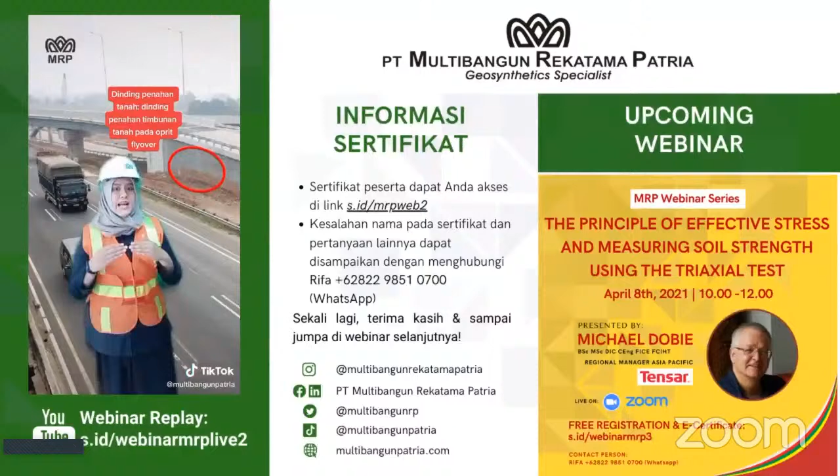Ini dinding penahan tanah, yaitu dinding penahan timbunan tanah di bagian oprit flyover. Tiang panjang atau bore pile adalah struktur di dalam tanah yang menahan jembatan.

Halo Sobat Multibangun, video kali ini kita akan membahas perbedaan antara insinyur sipil dan insinyur arsitek. Insinyur sipil menghitung kekuatan bangunan. Insinyur arsitek mendesain keindahan bangunan.

Insinyur sipil mendesain sarana dan prasarana seperti jalanan dan jembatan. Insinyur arsitek mendesain tata kota.

Insinyur sipil harus mahir menghitung. Insinyur arsitek harus mahir seni menggambar.

Insinyur sipil tidak harus paham warna. Insinyur arsitek harus paham warna.

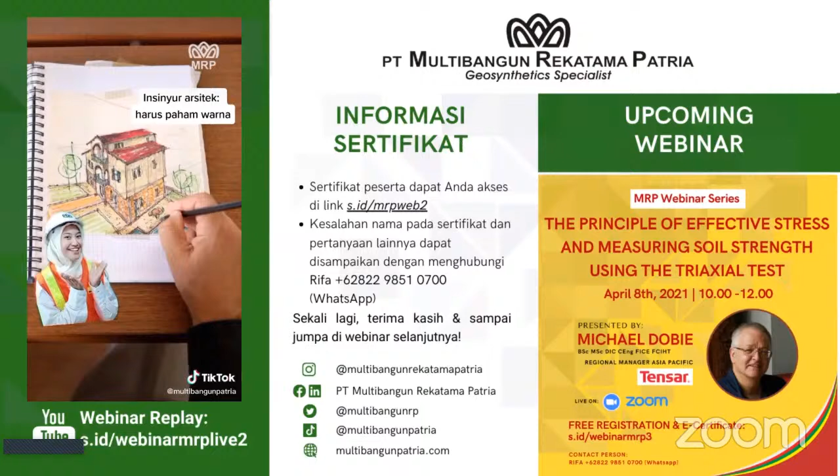Kalau insinyur sipil bisa jadi konsultan atau kontraktor. Insinyur arsitek biasanya jadi konsultan perencana.